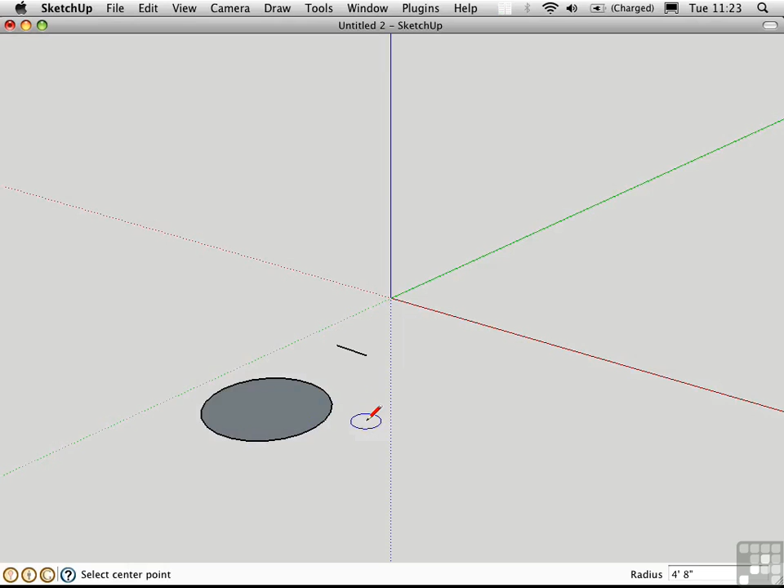I like to use the selection tool as a way to clear out the active command. Let's say I'm drawing a circle, and I'm done, and I don't want this circle attached to my cursor anymore. I'll press the space bar to go to the selection tool. Of course, you don't technically need to do this - you could go on to your next command, like the follow me tool. I could do that, but I just find that pressing the space bar helps me clear my mind and focus on the task at hand.

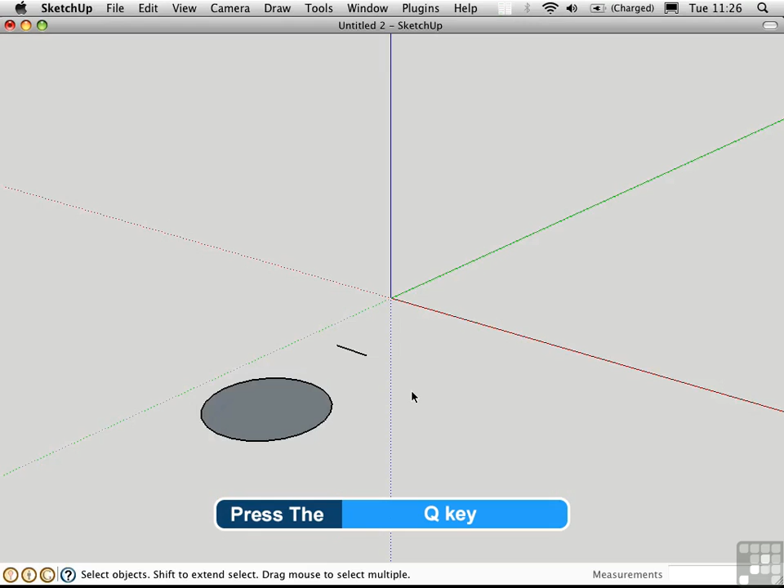That being said, in Windows the space bar doesn't always activate the selection tool. For some reason it's a little bit finicky. That's why I've used the letter Q to activate the selection tool in addition to the space bar in Windows. That's something you can only do in Windows - map two different shortcuts to the same command. On a Mac, you're limited; you only have one shortcut you can use at a time.

Okay, enough discussion. Let's take a look at a different file and learn some different selection modes.

As I'm sure you're aware, you can click on a face to select it, or click on an edge to select it. If you click somewhere else, you make a different selection, and the previous one is gone. If you double-click on a face, you get the face and its bounding edges - those are the edges that define the face. Here's a curved face. If I double-click on it, I get the face and its bounding edges, but not the hidden edges inside. If I go to the View menu and view Hidden Geometry, you'll see there are additional softened and smoothed edges in here that I'm not selecting.

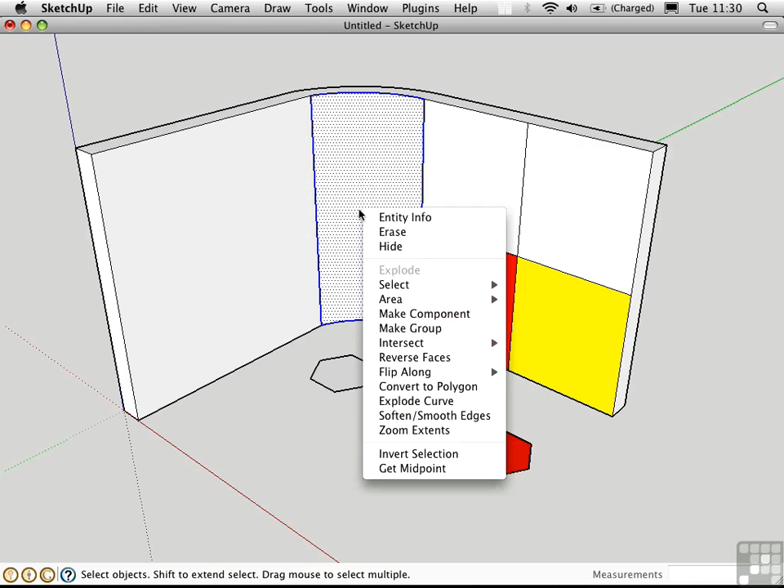If for some reason you wanted to get all of the edges involved in this curved face, you'd have to right-click on the face and choose Select Bounding Edges. Now we've selected those hidden edges as well.

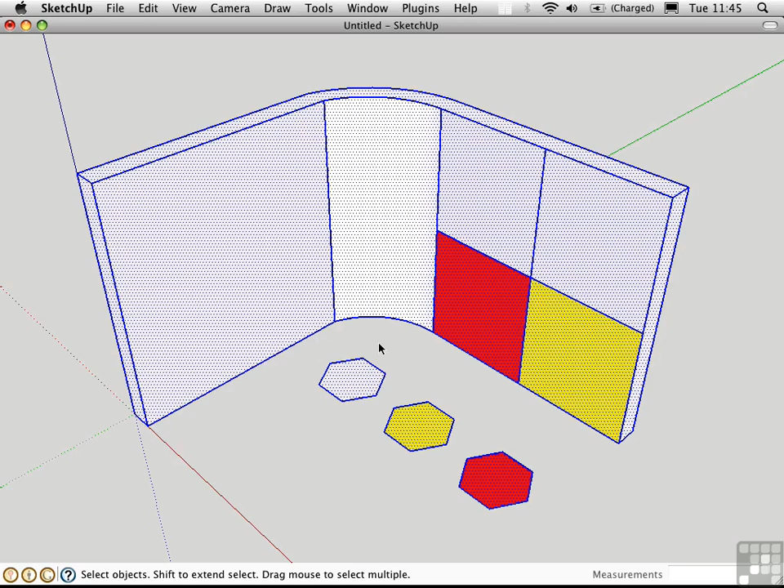Triple-clicking results in all of the connected edges and faces being selected. Technically, you can deselect by pressing Command-Shift-A, but it's much easier to just click off to the side where there isn't any geometry. Incidentally, you can select all by pressing Command-A, and this is actually useful within a modeling context, such as a group or component. If you press Command-A when you're in a group or component, you'll get everything in there, but you won't get everything outside of that context.

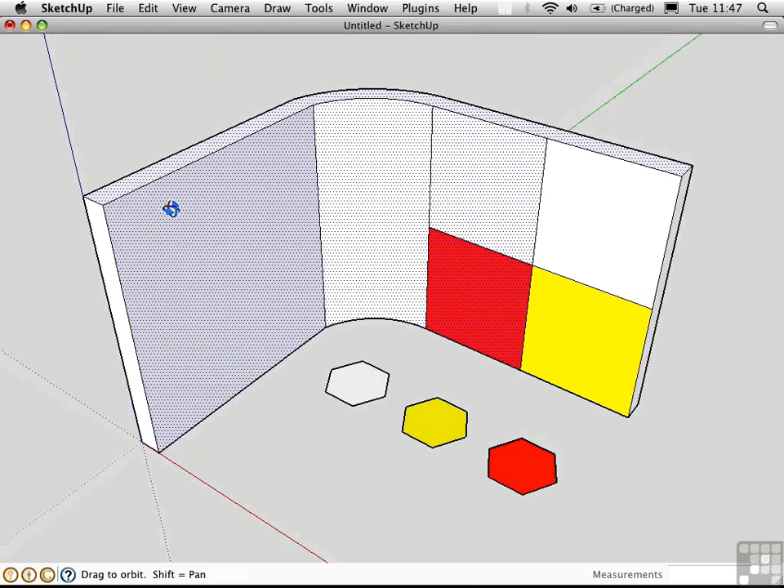Next, I'll deselect all by clicking off to the side, then right-click on this curved face and choose Select Connected Faces. This is something you can't get by clicking. I'm getting all of the connected faces adjoining this one - that is, this curved face itself, these two, this one, and the top face. None of the faces on the back are selected because they don't share common edges with the face I right-clicked on. I'd get a different selection if I right-clicked on, say, this face and chose Connected Faces.

Notice that I'm actually getting one of the faces within this curved surface. It stops here at the first hidden edge.

You can also select by material or layer. For example, I'll right-click on this red face and choose Select All with Same Material, and I also get this other red face in my selection set. Similarly, I can select this right face, right-click, and choose Select All on the Same Layer, and I get these two hexagons which happen to be on layer 1.

SketchUp doesn't have a lasso tool for selection. You can't make a crossing polygon or a fence like in AutoCAD, or a magnetic lasso like in Photoshop. Instead, you have to use the rectangular selection window in combination with your point of view.

Here I started making a selection from the upper left-hand corner, and as I dragged down, the selection window had a solid border. This is called a window selection, and it will only select things that are completely inside the window. Let's try that again. I'll start over here and drag down like this, and I'm only going to get that hexagon because it was the only thing completely inside the window.

If instead I start dragging the window from the lower right-hand corner, you'll notice that its border is dashed. This indicates a crossing window. Anything that this marquee touches or crosses will be selected. This is just like the behavior in AutoCAD, and it should be very familiar to you if you've used that program.

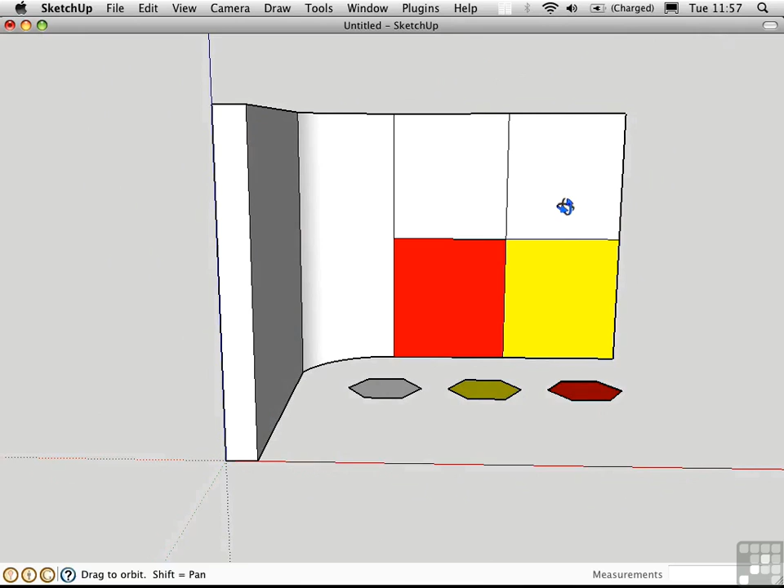It's important that you change your point of view when you're making selections in SketchUp. Here, by rotating my point of view, I can more easily select all of these surfaces on this wall, because they coincide with the geometry of the rectangle that I can drag out with the window selection.

There are 3 keyboard shortcuts for selection, and these can be used on their own or in conjunction with regular window and crossing window selections. First, there's the Shift key. It's sort of your multi-purpose selection tool, and it allows you to build up a selection set. I'll hold down the Shift key, and you'll see there's a plus/minus attached to the cursor. This means I can add or subtract to the selection, so I can build up a complex selection set.

I'll double-click here to remove this face and its connected edges from the set. Or maybe I want to add these additional edges just by clicking on them.

The Option key puts you in additive mode, so anything that you select will only be added. Shift Option puts you in subtractive mode. Now I can only subtract from the selection. Option and Shift Option are best used in conjunction with windows. So for example, if I want to add to the selection, I'll just hold down the Option key. If I want to subtract from the selection, I'll hold down Shift Option.

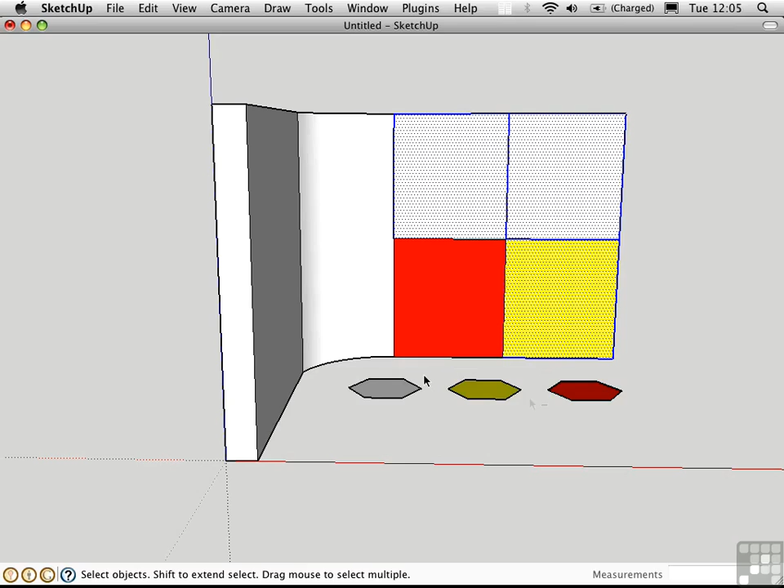There are a few other selection tricks that have to do with styles. I'll open the Styles window and edit the current style. Go to the face level here. I'll switch into wireframe mode, then deselect.

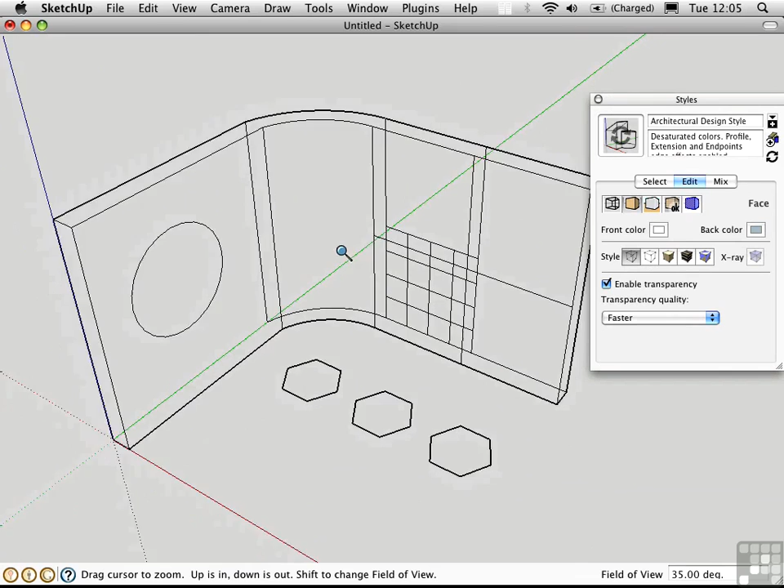I'll move this over, zoom out a bit, and make a regular window selection around everything. I'm getting all of the edges. I'll go back into the normal view here, which includes texture mode, and now I have a selection set that includes all the edges but no faces.

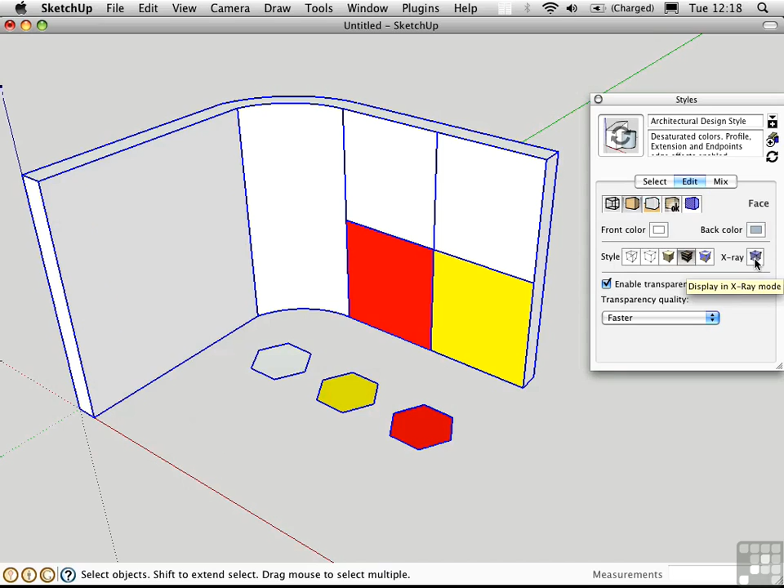X-ray is a powerful selection and visualization mode, and you can toggle it on by clicking this button. You can also press the X key, so I typically don't open the Styles dialog box for X-ray mode. In X-ray mode, you can see through faces to the edges that are beyond.

For example, in X-ray mode I can select this circle, even though it's obscured by this rectangular face. I can't, however, select that circular face. If I try to select it, I actually get this rectangular face because it's in front. I'd have to orbit around here and select the face manually if I wanted to get that. So X-ray mode is useful for edges only.

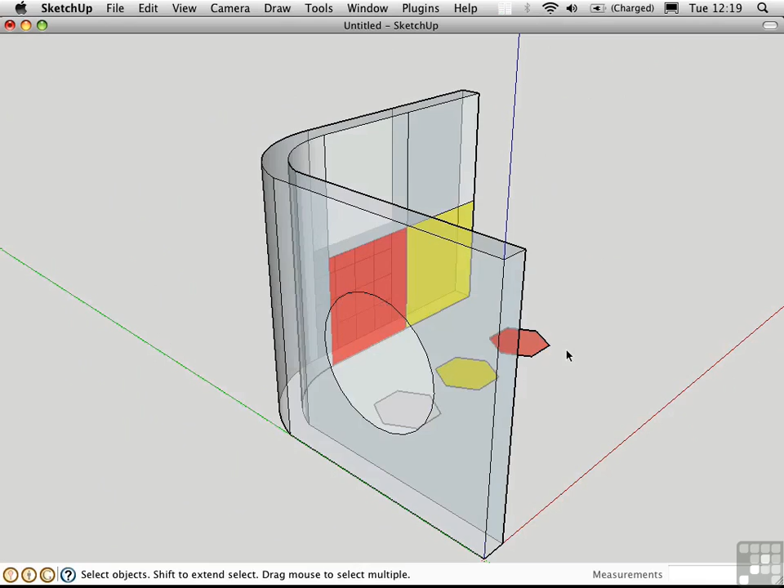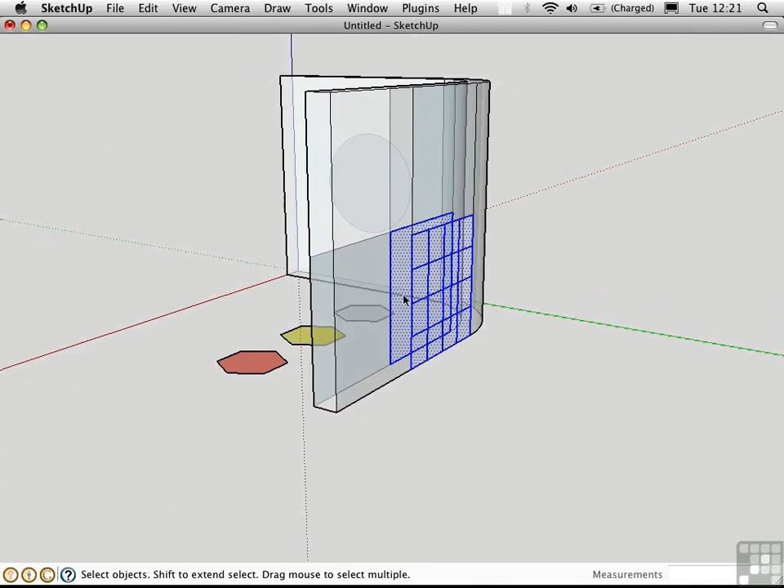It's also useful to help you see what's actually happening. If I make a selection here in the normal mode and make a window selection around this red face, it looks like that's the only thing that was selected. Toggling into X-ray mode shows you the truth. I also selected all of these edges on the backside. To get rid of them, it's necessary to orbit into some orientation where I can isolate that geometry.

Then I'll press Option-Shift to ensure that I only subtract from the selection set, and I'll make a window that encloses those things to remove them from my selection.